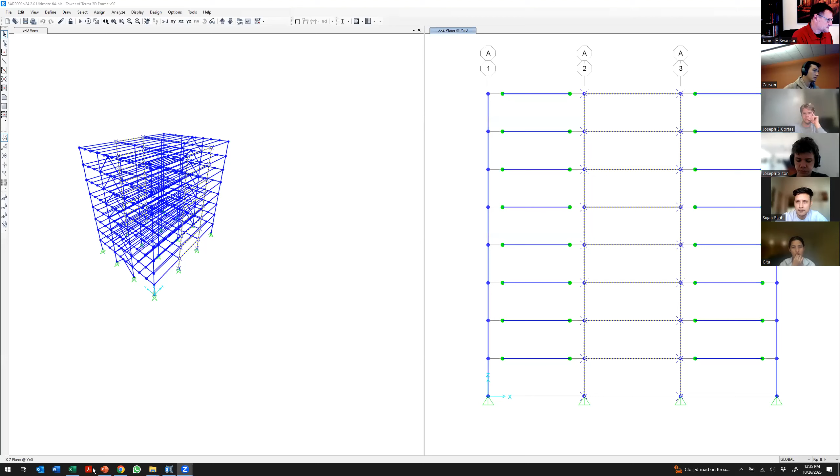I'm going to jump over to my other workstation now. I need to give me permission to share. Oops, that's there. Okay, hopefully you can see my SAP 2000 screen. Yeah, okay, good.

All right, so at the end of lecture on Tuesday, I was moving from 2-dimensional models into a 3-dimensional frame, and I was using the replicate command quite a bit. And I had used it erroneously in one case, and copied the girders in the wrong direction. So I went back through and I fixed that. So what you can see here on the left is a repaired, correct model. I still don't have the right member sizes in there, but for the purposes that I want to use it for, it's going to work just fine.

I did a couple of other things to it as well. One of the things that was missing from the model was I didn't have the gravity framing properly restrained at the bases, and I went back and I added that. And then I deleted the joint constraint definitions that I had as well, and I want to reapply those after I show you a couple of things. One of the things that I tried to do during lecture on Tuesday, not successfully, was to define groups to aid in our manipulation of the model.

So a couple of things here. Over here on the right-hand window, I'm showing a two-dimensional view. And if you look at the tab up here, it tells me where I'm at. I'm looking at the XZ plane at Y equals 0. And if I click in that, you can see in the left-hand pane, there's a little pale blue box that indicates which of those frames I'm looking at. So that kind of helps orient you within the 3D model of which 2D version you're looking at.

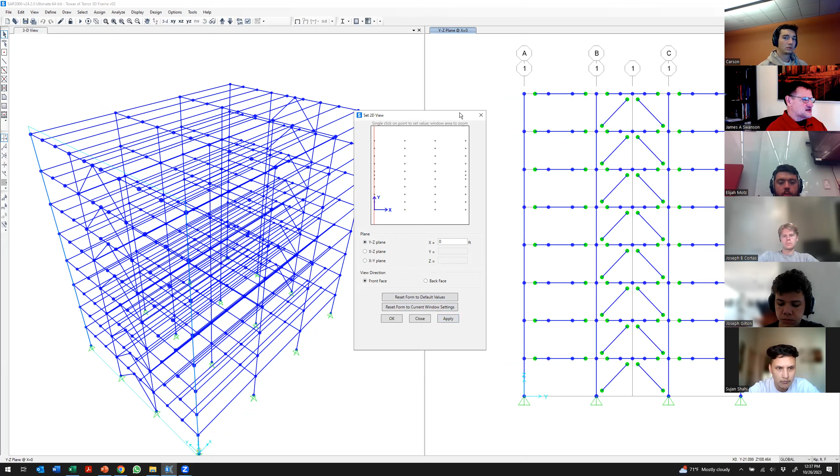In all cases, though, I'm looking at a two-dimensional view here. So there's no way to pan around and look at the way any of the members are oriented or anything like that. So another thing that you guys probably noticed that I did was I can go over here to the left window where I have a 3D view defined, and I can set limits. And if you're conversant in Autodesk Revit, then there's a window box you can use in Revit to limit what it is you're looking at. And this is very similar to that.

And so what I can do is set my bounds. If I want to limit things in one plane or another, let's see, I'm looking at the XY plane now. So if I want to look at just one frame in the XY plane, I can draw a window over that. I hit apply. And now I'm looking at the moment frame in framing line D.

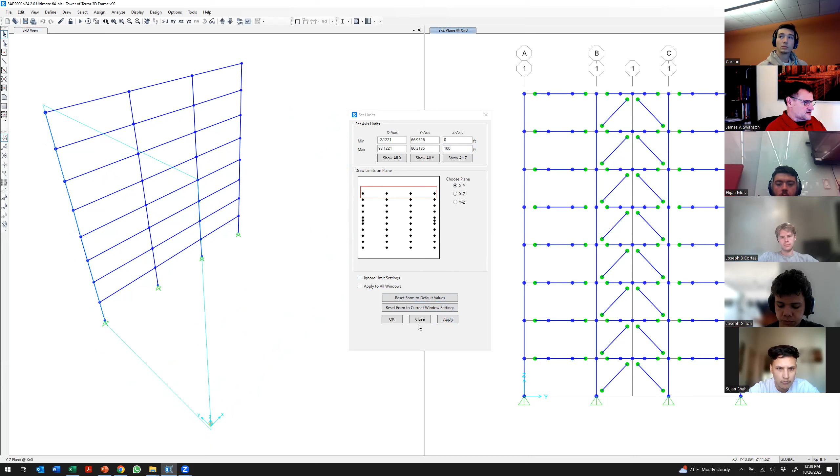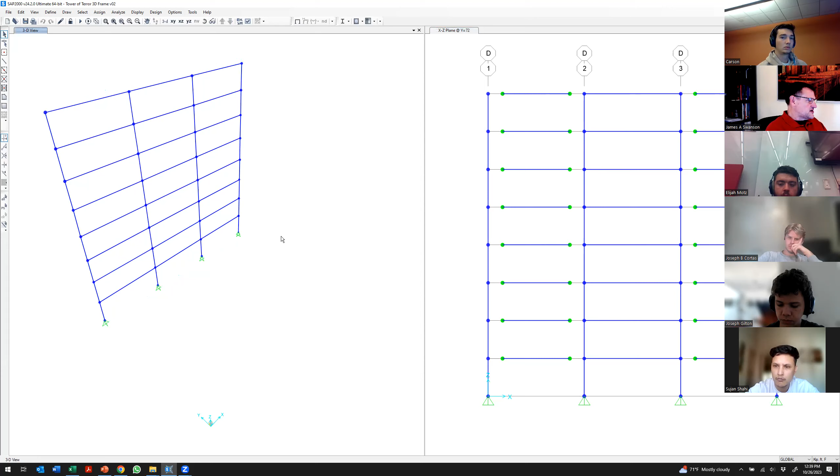Now I can get the same thing over here in this window on the right. So let me do that. Let's go back here, define a 2D view. I'm going to look at the XZ plane at Y equals 72. And so I'm looking at the same frame in both views, but one thing that's important to note is this is a 2D view on the right, whereas this is a 3D view over here on the left. And so I can pan around on this and manipulate it any way that I want to, because it's depicted as a three-dimensional view.

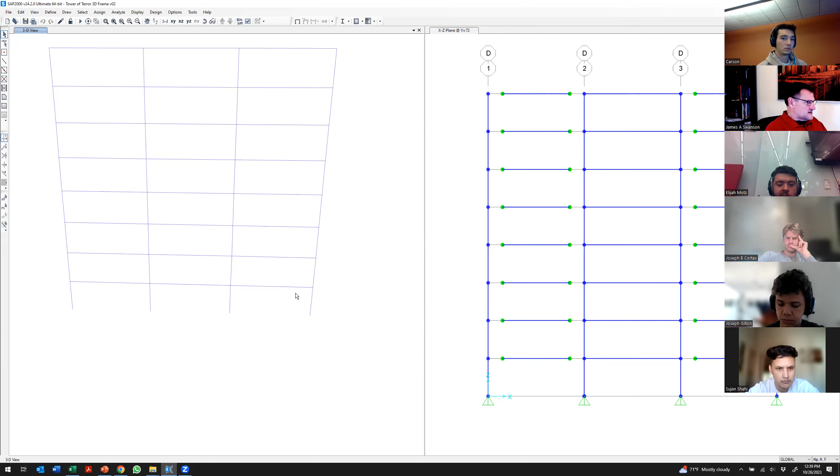And so now I could go in if I wanted to and look at the extrude view of the model. And then I can zoom in and look at the way the members are oriented and that sort of thing. So you can see how the beams and the columns are arranged, right? All right, so those view options are fairly dynamic.

There's a lot of good tools that are built into SAP 2000, but I would be lying if I said that the graphics are awesome, right? If you go and look at something like Autodesk Revit or Autodesk Fusion 360, the graphics and the renderings that are available in those packages are just far superior. I hope that someday in the future SAP 2000 will just go ahead and rebuild their GUI from the ground up so we get better renderings, but their focus is appropriately on analytical tools, not necessarily graphics tools. So that's one of the drawbacks.

And you guys saw with Maggie last week that if you look at Tekla Structural Designer, TSD, the graphics there are, at least in my opinion, better. And I suspect that has a lot to do with the idea that TSD is a younger piece of software. So when it was written, the graphics tools that were available were superior to what's built into SAP 2000.

Let me go in here and get rid of the extrude view. I think I just did that. Nope, I did not. There we go. Now hit apply. Let me do one more thing over here. I want to go back and get rid of the window box or the limits. And so there's a button here. I can show all Y, show all X, hit apply. And then now I get the entire model back.

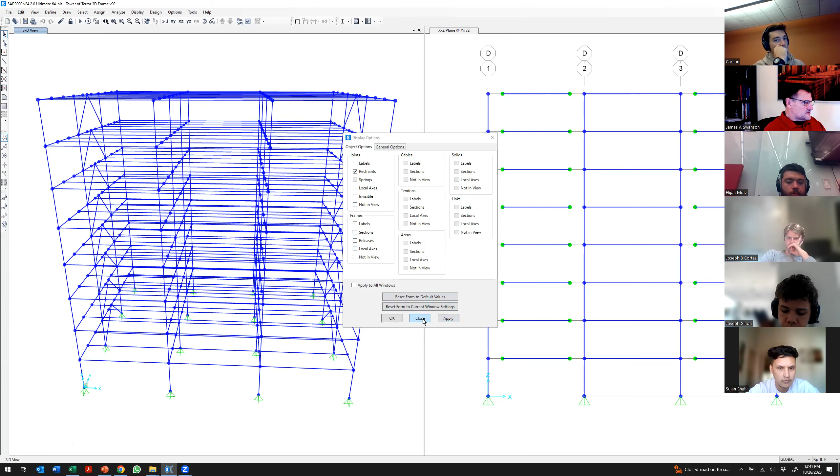All right, I've got the releases shown in there. They kind of make the window a little bit cluttered. So let me get rid of those as well. Okay, good. I can even get rid of the nodes, make them invisible, and then that makes the window even less cluttered. There we go.

Okay, so one of the things that I was trying to do the other day was to name groups, and I wasn't able to get it to work. I think I had the right process, but I didn't execute it properly. I went back and tried it again after class, and it worked just fine. And so the process is 2 steps. One, you go in and define what you want the groups to be. And I have 4 groups defined plus the default all.

And so basically I have one group for moment frame one, another for moment frame two, brace frame one, brace frame two. And so what I did is you define what the groups are. Then the second step is to select something, members or nodes or something like that. Then you go to the assign and you assign those objects to the groups. And so it's a two-step process, much like it is defining a joint constraint.

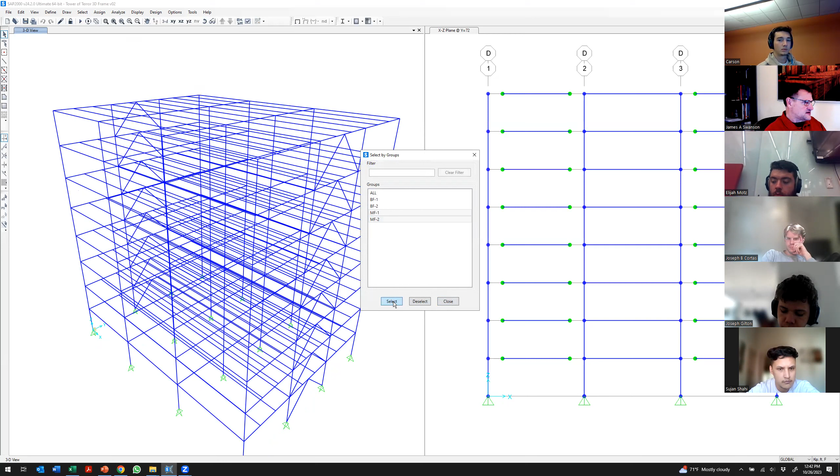And so the benefit to that is that you can isolate those things more easily than you would be able to without. So for example, if I want to just look at the moment frames in this view on the left, I can go in here and say select, and then I can select using groups, and I can select all the objects that are assigned to the two moment frame groups that I defined before class. I hit close. Now what I can do is go over here to the view window and I can show just the objects that are selected.

And so now I'm looking at a 3D model that has all of the beams, columns, and braces in it, but I'm only looking at the beams and the columns that are part of the moment frame groups. And so that could be really useful when we're looking at the results afterwards, because now I can go in and analyze just the moment frames and the view isn't cluttered by everything else.

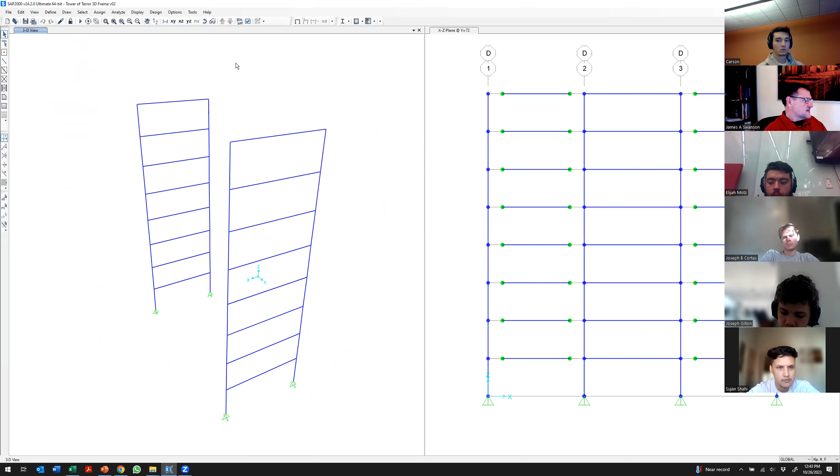So let me go ahead now. I'm going to go back to view. I want to show all. Let me show you how I would do the assignment for the two brace frames. So I need to remind myself what the framing layout is. So off screen here, I have the PowerPoint that we've been working from. So I've got brace frame one is in framing line one, brace frame two is in framing line four. I should have a better naming system, but I don't.

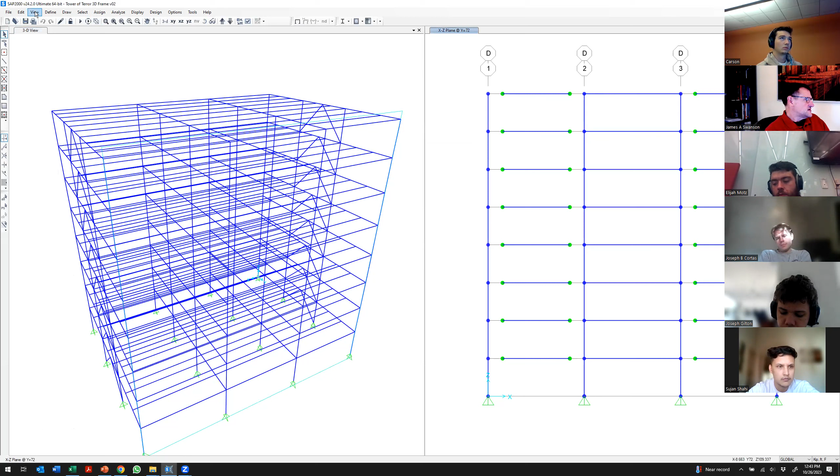So let me go over here in my 2D view. I'm going to define that 2D view. I want to look at the YZ plane at X equals 0, which is framing line number one. And so that brings up this 2D view on the right. I can go in here now, window over the members that make up the braced frame. Now I can go to the assign menu, go to assign to group. I want those to be a part of braced frame number one. Okay, let me close that.

Over here on the right, I'm going to switch over to the YZ plane at X equals 96 feet. And that gives me brace frame in framing line number four. And then I'll do the same thing. I'll window over that brace frame. Now I'll go to assign to group, and then I'll assign those objects to brace frame number two. Hit apply, hit close. I'll close this window out as well.

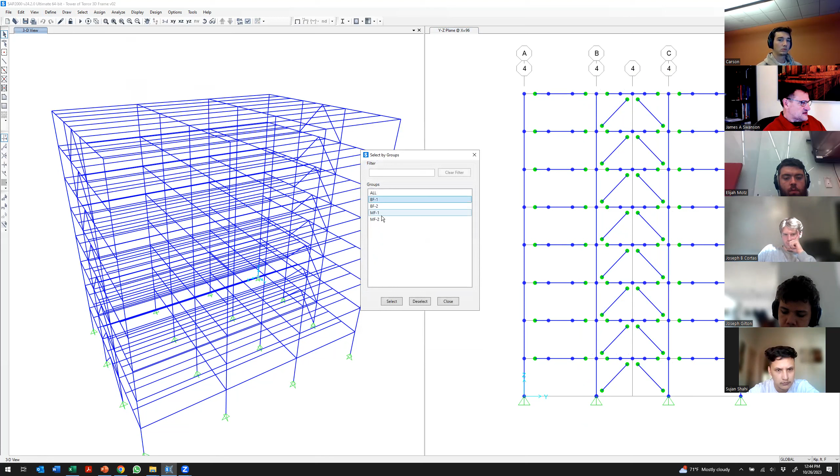Now what I can do over here is I can select based on groups. There it is. And now I can select all four of those lateral frames, select those. Then I can go to my view menu and I can just show the selected objects. So now all you see are the lateral frames that are part of that model. Now, the rest of the framing that's in the model is gravity framing.

So what I can do then is I can go over here to the select. I can invert the selection. Invert selection. And so that basically selects everything that's not part of those groups. And so there's nothing in the view on the left to see that was selected. But if you look over here on the right, it selected the remaining members. So now I'm going to go in and assign those to a group.

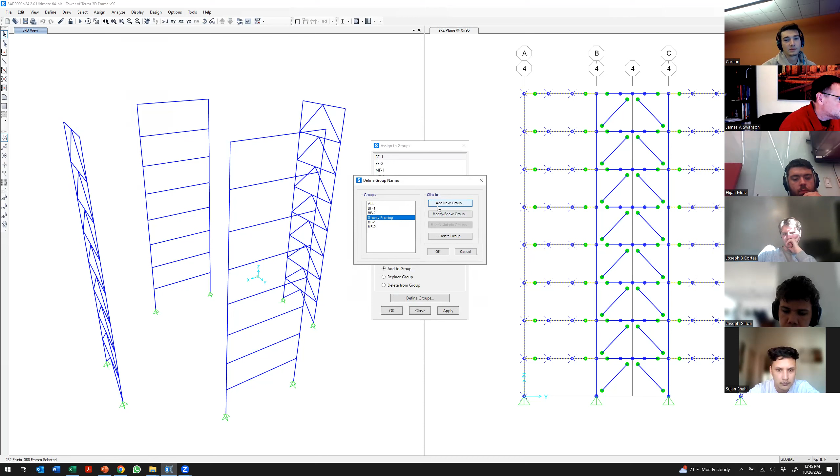I'm going to go to my group definitions. I'm going to add a new group. I'm going to call it gravity framing. If I can spell it right. Nope, I still spelled it wrong. Okay, and I'll go ahead and hit OK. I'll hit OK again. Now I'll go over here and I'll add those members to that group. Hit close.

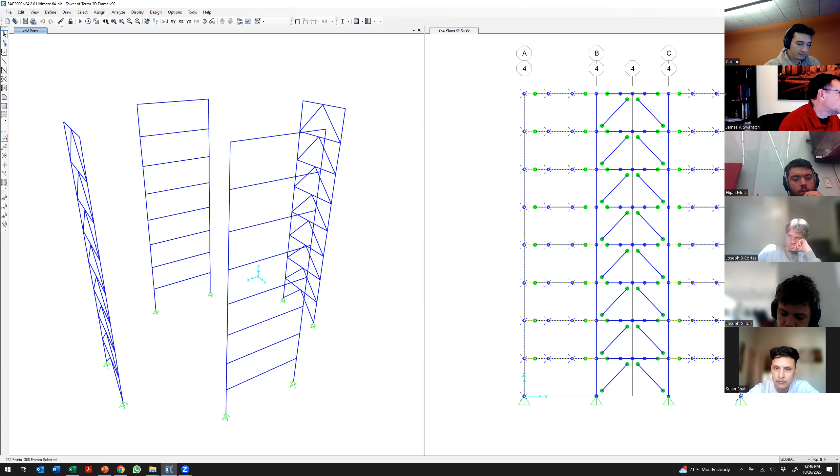Now I can go over here. I can go to select by group. I can select the gravity framing. Even though it's not shown in the window on the left, it's still selected. And now I can go here to view and show selection only. And now I get the gravity frame.

And so what you can see is that we're missing pieces of the model, and everything that's missing is something that's been assigned to the lateral framing groups instead. So I was trying to show that on the fly on Tuesday, and I hadn't rehearsed it beforehand, so I must have screwed up the order of operations or something along that line.

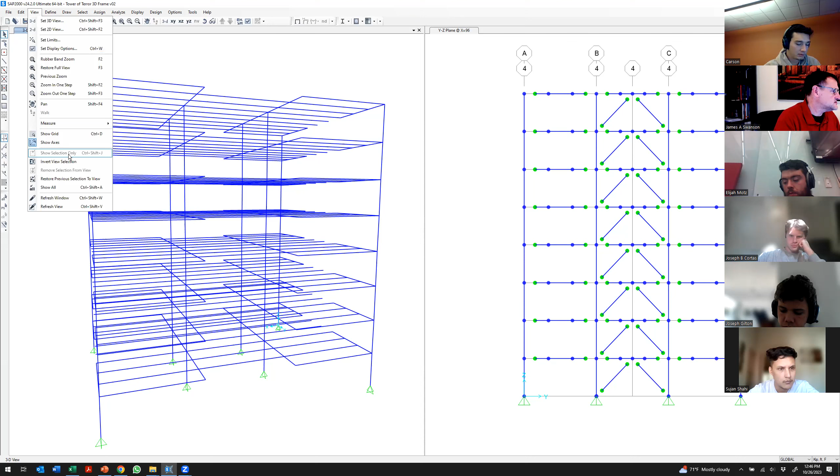So, all right, let me go ahead and show all. So that's Control Shift A. There we go. Now the entire model is back in here. So I told you that after I finished class the other day, I removed the joint constraint definitions that I had. So one of the things you'll see here is that I don't have any joint constraints.

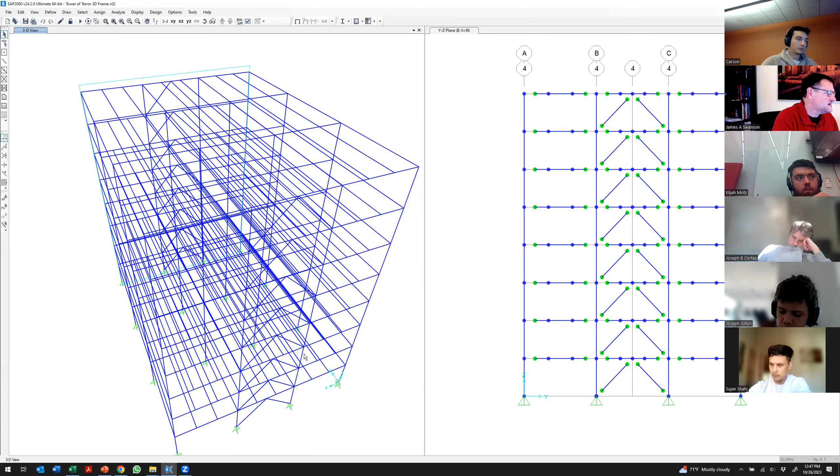And to illustrate the idea of the importance of a joint constraint, what I'm going to do is put a couple of loads in here. I'm going to go ahead and just select these two nodes on that face there. So I'll hit Shift and select that one. Come on. There we go. And I'm going to apply a load there. That's going to be in the X direction. So I'm going to go in here.

I'm going to assign joint loads, forces, and let me go ahead and add it to, I should create a new wind load, but let me do that. Define load patterns. Let's call it W, and I'll call it point loads because it's going to be point loads. It's going to be wind like that, and I'll add that in. Hit OK. Now, if I go in, I can assign joint loads there.

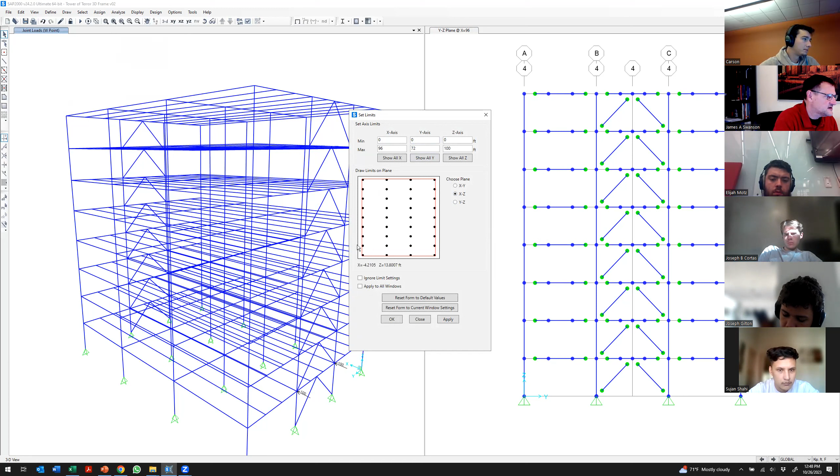Let me just make up a large number. It's going to be in the X direction. Let me put 100 kips at both nodes. I hit Apply. I hit Close. Now, let me define my limits, and I just want to look at the first story of framing. So let me look at the XZ plane here, and I'm just going to window over that, which gives me my first story of framing. There we go. Okay, now if I go in and run this model,

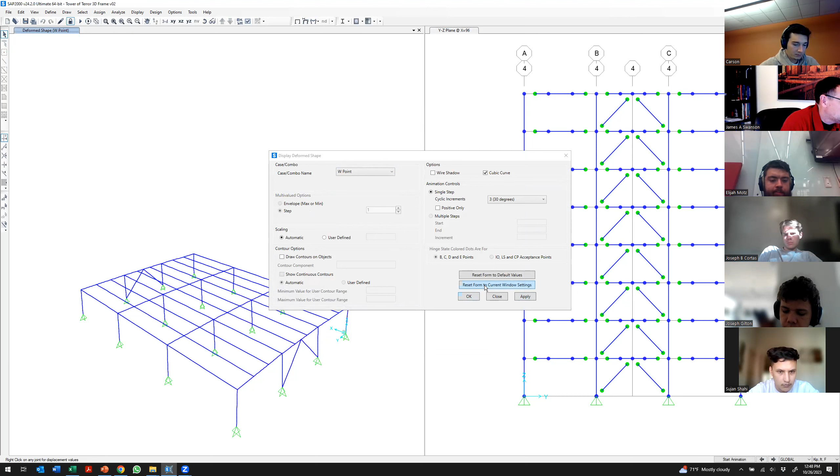I can go in and look at the displaced shape that I have under that wind load. So let me go in here, select W point, hit Apply, and let's close this window out, and we'll animate that.

I love the noise. All right, so you see the problem that we have without the diaphragm defined in this model is that the loads where they're applied at this edge aren't transferred over very well to the moment resisting frames that are on framing lines A and D. And there's a little bit of transfer of force over there through some frame action that exists in the model. But what we would expect to see instead is that thing shift as a plate element or as a

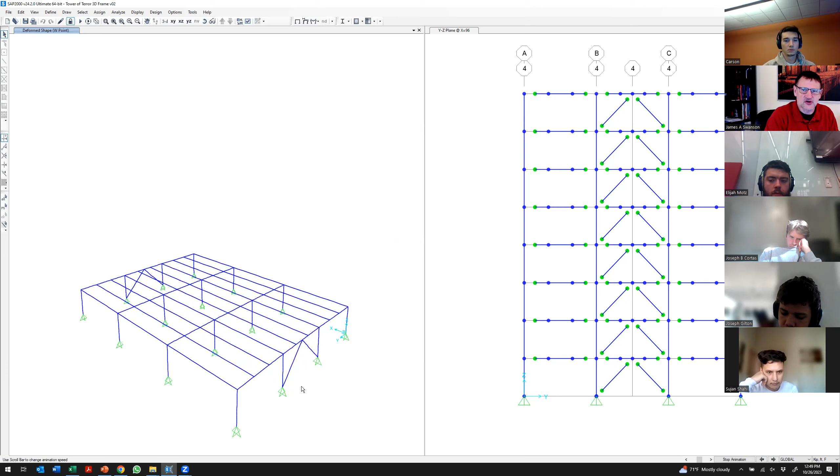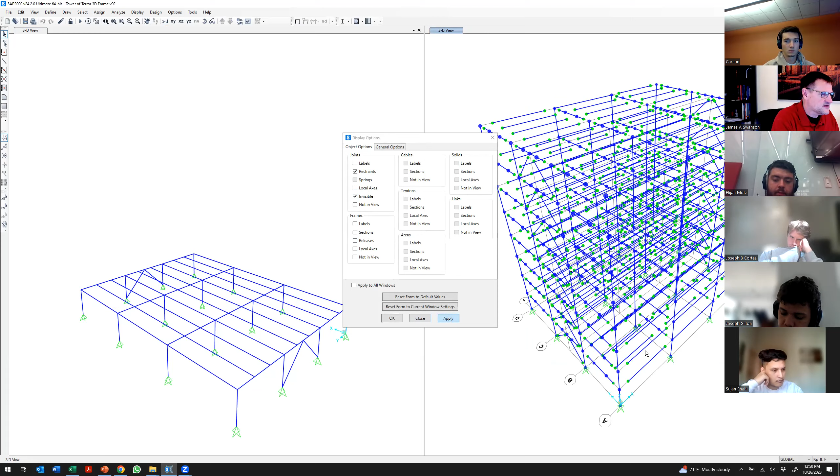diaphragm. And so what I want to do now is go back in and define diaphragm constraints and show you the difference in behavior that occurs when I do that. Let me go here on the right. I'm going to define a separate 3D model. Let me get rid of those member releases, rather. There we go. Now I'm going to orient this model so that I can select a lot of nodes.

Let me go in and define the constraint first. Joint constraints. I want it to be a diaphragm constraint. Add that. And it's going to be Z-axis, and we'll say we want a different one at each Z level. Hit OK. Hit OK again. Now what I'm going to do is select all of the nodes, but I'm not going to select the nodes at the ground level.

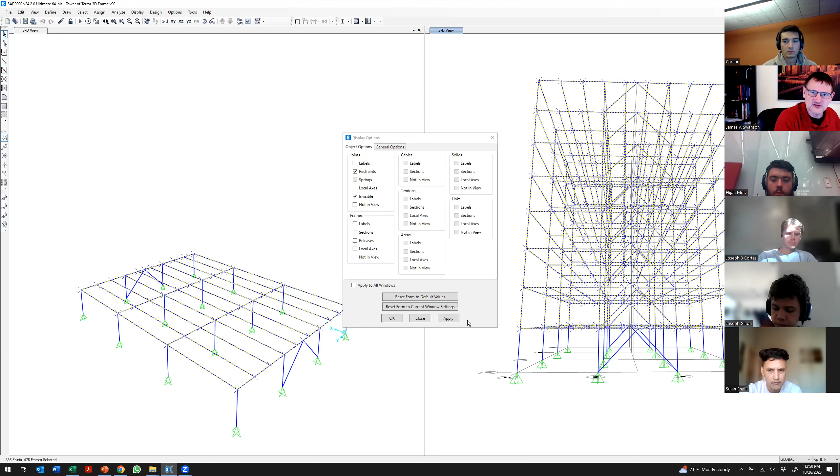I did that the other day, and I think that led to numerical problems where we have a constraint assigned to nodes that were also restrained. And so if you assign a constraint and a restraint to the same node, you're basically over defining its degrees of freedom. So let me go here now to assign joint constraints, and I'll assign the diaphragm constraint to all of those nodes. Okay, I'll close that out. I'll close this out as well. Let me go in and redo the analysis.

And now let's look at the deformations that we get out of those wind loads. So looking over here on the left, now you can see how that translates as a rigid diaphragm instead of having the frame action and giving us the in-plane deformations that we don't want. All right. So at this point, then the last step would be to go in and define our loads a little bit more explicitly. So let me show how I would do that.

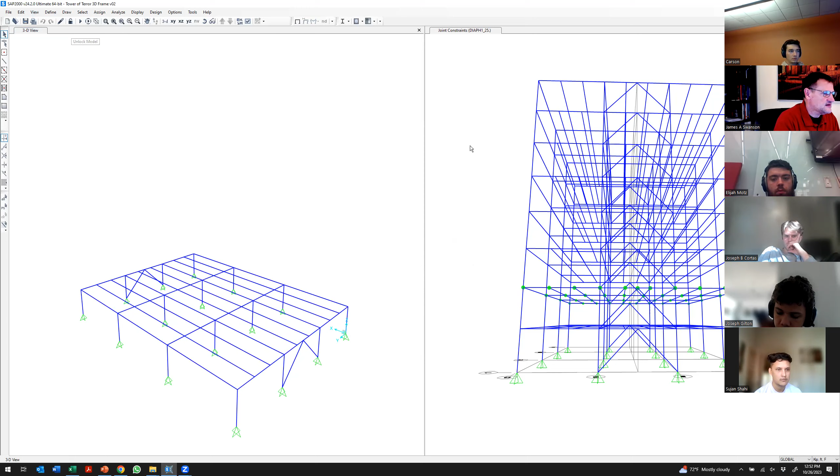Let me unlock the model. Thank you. I can use this model here. I'm holding down the shift key and then the center mouse button in order to pan around.

And yeah, the graphics are getting a little wonky, for lack of a better word. I think that when I'm using Zoom to capture the screen and I'm using SAP 2000, I don't think those two packages play very well together. There we go. Now refresh that.

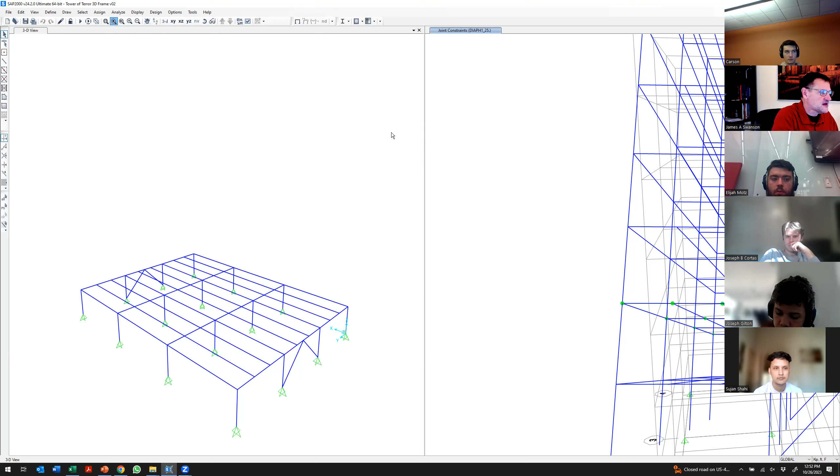So what I want to do is I'm going to go in and define my load patterns again. And the other day when I had diaphragm loads, I had the loads in the X and the Y direction defined in the same load pattern, which makes it impossible to decouple them. It's impossible then to apply the loads in the X direction without the loads in the Y, or vice versa. So I'm going to go ahead and delete that load pattern. I'm going to create two new ones.

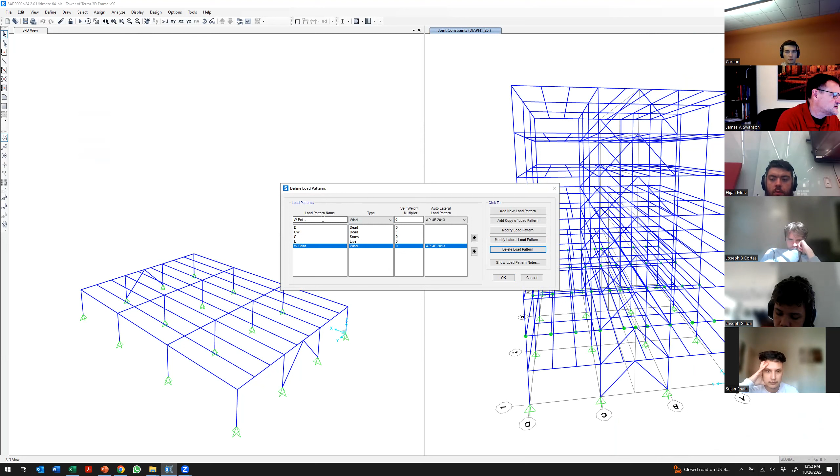I'm going to call it WX for wind with a user-defined wind pattern. Let's see, add new load pattern. I'm going to call this W sub Y with a user-defined load pattern. There we go. And so what I'm going to do next is go in to my model, and I'm going to define the wind loads that I want to apply to this structure. So here's our wind criteria.

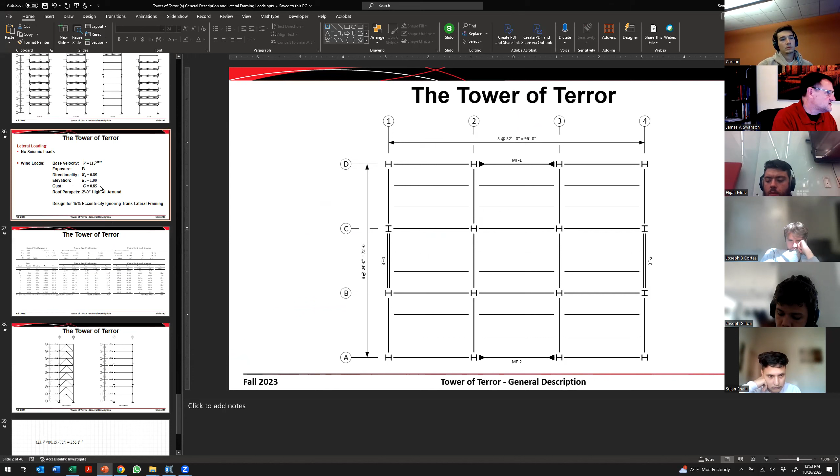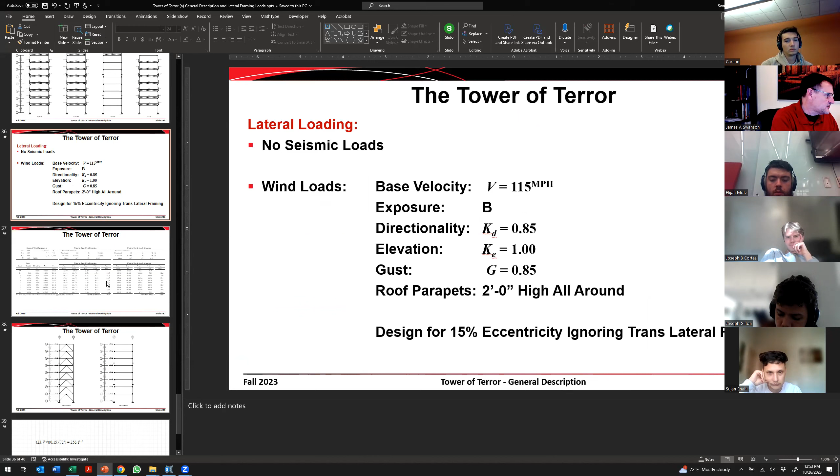We want to apply the wind loads that result from a 115 mile per hour base wind velocity with an eccentricity of 15%. And so what I'm going to do is basically take these loads here, 23.7. That's going to be the force that I apply, but I also need an in-plane moment as well. So if I go in and multiply that force of 23.7 kips times 15% of the breadth of the building, 15% of 72 feet, then what I end up with is an in-plane moment of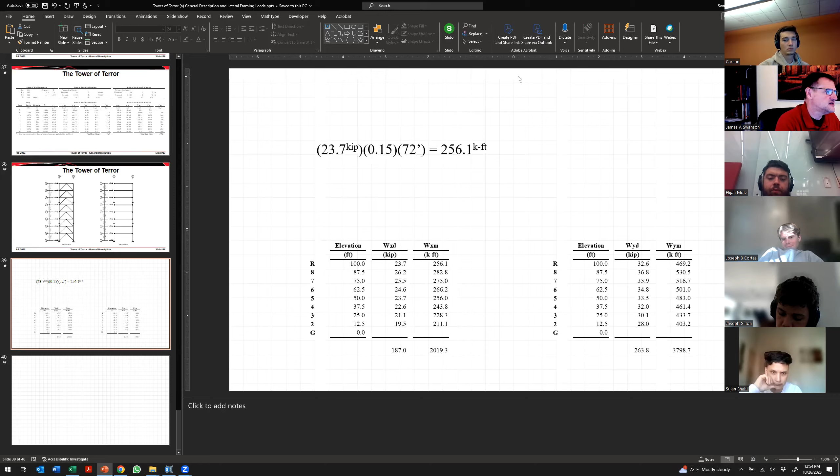256.1 kip feet. So I'm going to take these values here, W sub XD and W sub X moment. That's the wind in the X direction that's directly applied as a force and the moment that results from that. And I'm going to define those in the wind load definitions for the diaphragms. So I can go now to define, go back to load patterns. I can go to my WX case, and I can go to modify lateral load pattern.

And so what I'm doing then is just typing those forces in, 23.7, and then the moment that I have that goes along with that is 256.1. And so I got to make sure I'm in the right units because I've got kips and feet, and that works out just fine. I put that in the wrong box, so let me fix that. That should be FX, 23.7. Okay, down here I have 26.2, and then 282.8. Right, and you basically can enter in your story forces like this, and I find it to be a lot easier than applying loads to the outside of the building.

Okay, I got the wrong number again. I just talk about how much easier it is, and then I screwed up. 266.2 here. Right. And so we could go through and do that for all of these. 23.7. Let me do it this way. 22.6, 21.1, and 19.5. This here is going to be 256.0. This is 243.8. This is 228.3 and 211.1.

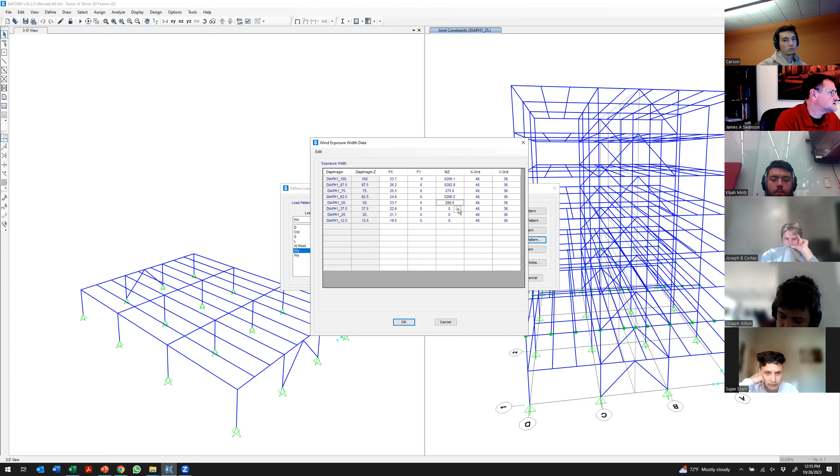Okay, I'll save you the agony of watching me put those in the other direction. Let me delete those point loads. Don't need that anymore. Hit OK. Now I can go through and do my analysis. All right, and so what I can, oh no, I got an unstable.

Welcome back. Ah, good. There we go. I was worried everybody else left. Yep, that's Spectrum for you. All right, let me get back in here. So I'm on my Verizon phone right now. I have 5G service, but in order to make it work, I have to perch it in the window. Okay, pardon the interruption. I wonder if that'll come out as one recording or two.

Find out, I suppose. All right, so yeah, over here on the right, I'm going to select the XZ plane again. Let's look at the moment frame on framing line A, I think it is. And so there we go. Now what I can do is come in and look at the moment diagrams over here on the right. So I can go to frames, look at wind WX.

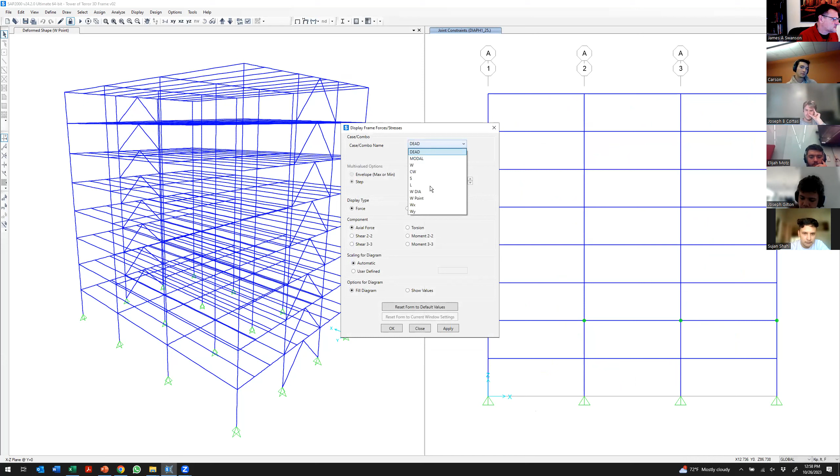I can look at the bending moments that I have. And I get bending moments in the members that I would expect, and I don't get bending moments in the members that are supposed to be pinned. So none of the gravity beams have any bending moments in them, but the columns over here on the corners, those are gravity columns. They still have some bending moment in them, though, but it's small.

And the reason there is bending moment in those columns is because those columns are continuous across the floor levels. We don't pin them at each end. You can do that, and it's not irrational to pin them in the model, but when you do that, then you run the risk of getting some instabilities in the model that would create problems for you. If you release it too much, then you'll start to get warnings out of the software that aren't great.

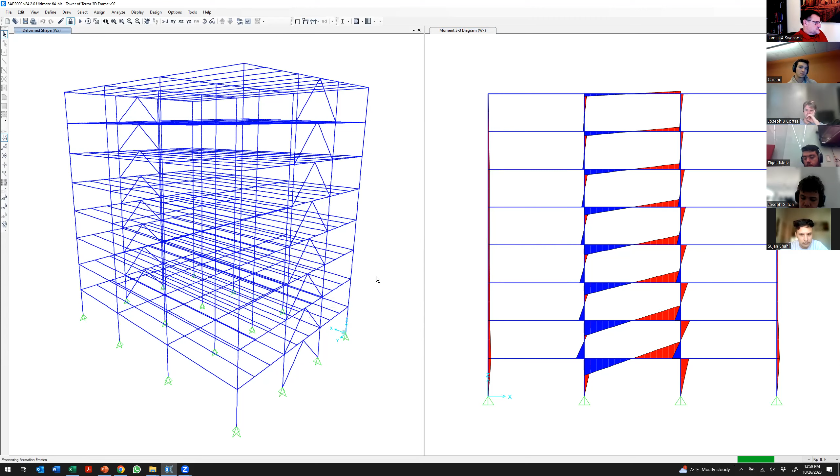Then we can go over here and look at displacements in the 3 dimensions. So we can go to WX, hit apply, and we can animate that. Right. And if we go in and look at the 3D view from the top, let's see, I'm better off doing this. Stop that. And then hopefully from this direction, you'll be able to see translation and a little bit of rotation. I don't see the rotation, but it's there.

All right, so that gives us a lot of tools to work with. We're still missing a few things in this model, though. Most notably, I haven't applied any of the gravity loads. I haven't applied the snow load to the roof, the dead load to the members, the curtain wall load. I haven't applied the live loads or anything like that.

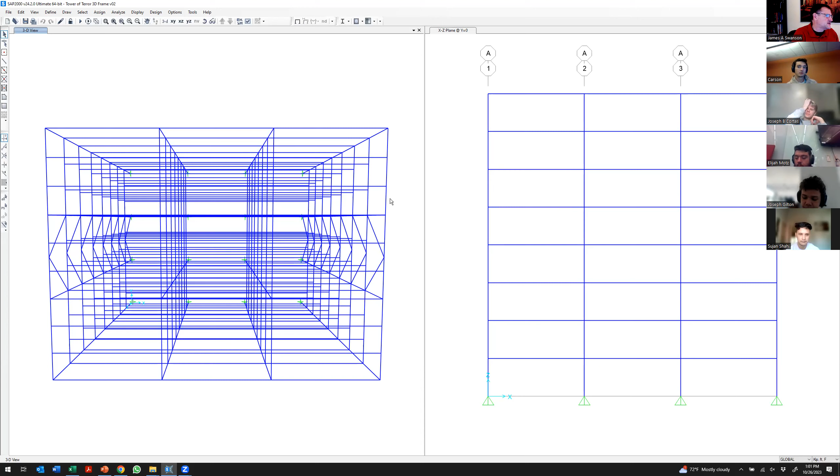And the reason I haven't taken the time to do that is, number one, I don't want to bore you guys any more than I already have in class. But second, there's a really easy way of doing that if we use shell elements. And the problem is that we don't yet know what shell elements are. So let me go ahead and shift gears to our presentation on continuum elements. Let's see, I gotta find that. There we go.

All right. And so the first thing we want to do is define what a continuum element is. So what we've been doing so far is using discrete element modeling, where we basically use one element or one object to model every physical object that's in our structure. Now, it's not strictly true when you talk about automatically meshing beams into 8 sub-elements or 10 sub-elements, then we're not really using one element for every physical object in the model, but I think that that's still a fairly

good definition. On the contrast, finite element modeling is where we use several elements to model each physical object within our model. And the most common type of element that we're using in that case is a continuum element. Beams and frames and trusses, those are line objects. They only have one, let's see, one dimension that defines them, and then you apply section properties to them.

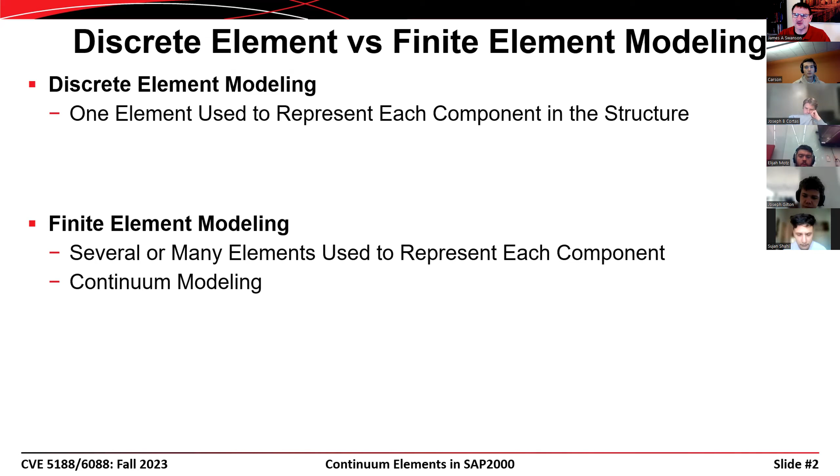So when you look at the definition of a line object, it has a length. Then you assign section properties to it, but in our model, it doesn't necessarily have a height or a breadth. Continuum elements, on the other hand, usually have at least two dimensions that define their geometry, either a length and a width, sometimes also a depth if it's a three-dimensional object.

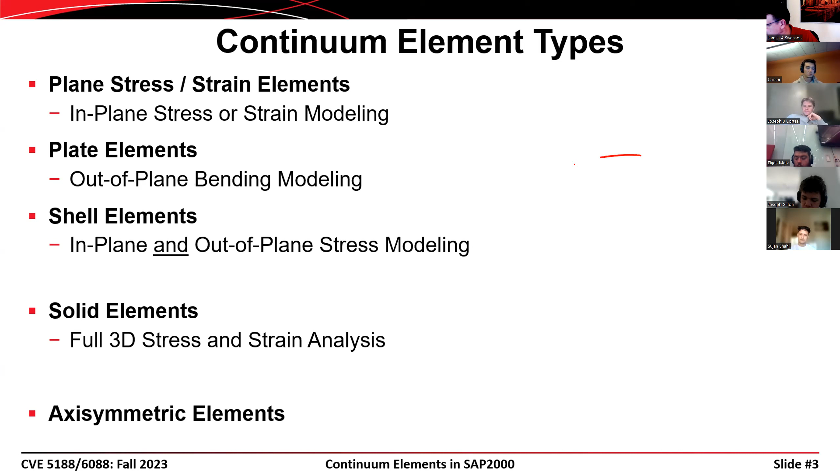So the type of continuum elements that are available in general are plane stress or plane strain elements, plate elements, shell elements, solid elements, and then axisymmetric elements. So an axisymmetric element is an interesting element that we don't use very often. But if you have a structure that has an axis of symmetry, then you can use an axisymmetric element to model that.

And so a common example that I use is if you had like a cooling tower on a power plant like this, for example, then you would have an axis of symmetry that goes down through the center of that cooling tower like that. And so what you could do then is define an element that is axisymmetric, and you could model the behavior of that cooling tower by just defining a section. And then the model, when it does its analysis, takes that section, revolves it around the axis that you define, and so you can have an economy in your analysis by using that axisymmetric element. What we're going to use most often in our class are the shell elements.

If you go into more advanced finite element modeling, some of the graduate level courses, then we use solid elements quite a bit in programs like Abaqus or ANSYS to do modeling of components and things like that. In this class, the shell elements are very useful for us to model planar objects like a floor slab, like a bridge deck, like a shear wall, things of that nature. And so that's where we're really heading with this.

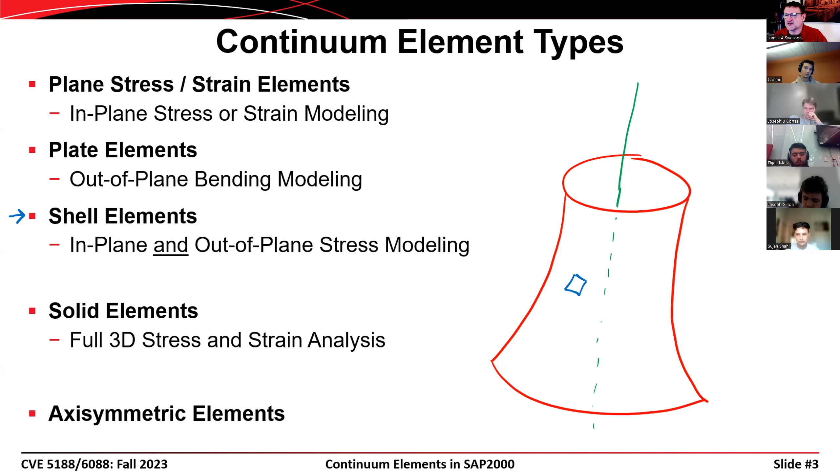The rest of the stuff isn't uninteresting, but for the purposes of this class, we need to know what shell elements are in order to be able to use them in our models. All right, so let's define these elements. The plane stress and plane strain elements come in a couple of different flavors. There's a triangular element that has 3 nodes and a quadrilateral element that has 4 nodes. It looks like a square, but it doesn't have to be square. It just has to have 4 sides. So that's why we call it a quadrilateral element.

And so when you go and look at this, the 3-node triangle has 3 nodes defining its geometry. So J1, J2, J3, joint 1, joint 2, joint 3. And then we have the local axes here, local axis 1, axis 2, and then the local 3 axis is perpendicular to the plane that's defined by those three nodes. And then at each one of those nodes, we identify 2 degrees of freedom. So this element has a total of 6 degrees of freedom associated with it, 2 degrees of freedom at each node.

And so one of the limitations is that it doesn't permit any out-of-plane deformation. It doesn't permit any bending either. It's totally a plane element. The one on the left is very similar to the one on the right. The quadrilateral is similar to the triangle, with the exception that we have a 4th node that's defined. And along with that come 2 more degrees of freedom, degrees of freedom 7 and 8, as I've shown here.

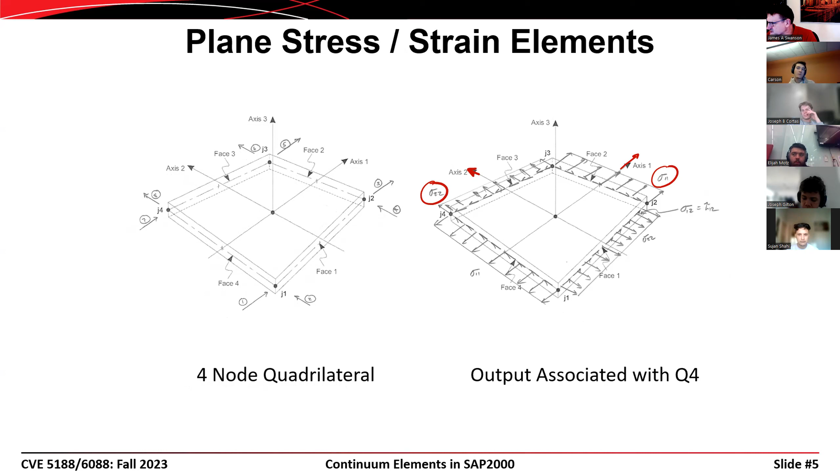All right, now when we look at the output that's associated with these, we usually look at the stresses that are in the local directions. So we have the 1 axis here, so we have a sigma in the 1 direction, sigma 1,1. We have the 2 axis here, so we have a sigma in the 2 direction, sigma 2,2. And those are normal stresses. And then there's also a shear stress as well. And on this face here, we'll define it as sigma 1,2. And that's really a shear stress.

But if you go back and look at it from a fundamental point of view, a lot of the older texts don't distinguish between sigma and tau for the shear stress. They just use the notation sigma 1,2 as a shear. So if it's a sigma 1,1, it's a normal stress. Sigma 2,2 is a normal stress. Sigma 1,2 is a shear stress. And so the notation there is that that's sigma on the 1 face, but acting in the 2 direction. That's, I think, how that works out with that notation. And that's something that might vary from one package to another.

All right, so when we look at plane stress elements, by definition, the stress in the perpendicular direction, the 3 direction here, is going to be equal to 0. When we look at plane strain elements, then the strain in the 3 direction is equal to 0 instead. And so at first thought, you might think that the two are equal, but they are not. If you have plane stress, that means that the outer surfaces of your element are free to move in and out. So if you take a plane stress element and you pull it, it's going to get a little bit thinner because of Poisson's effects. But the stress is always equal to 0, even if the strain in the 3 direction is not.

On the other hand, if you look at a plane strain element, then the strain is taken as equal to 0. So if you pull on it in one direction, it doesn't get any thinner, but instead it develops a stress corresponding to the restraint that you apply in that 3 direction. So most often we're looking at plane stress elements that are useful to us. If you were going to model, say, a plate to represent the flange of a beam, most often you would use a plane stress type of element. But there are cases where a plane strain element is appropriate, and if you were going to model a gravity dam, for example, a weir, then you would probably take a slice of that dam and model that section.

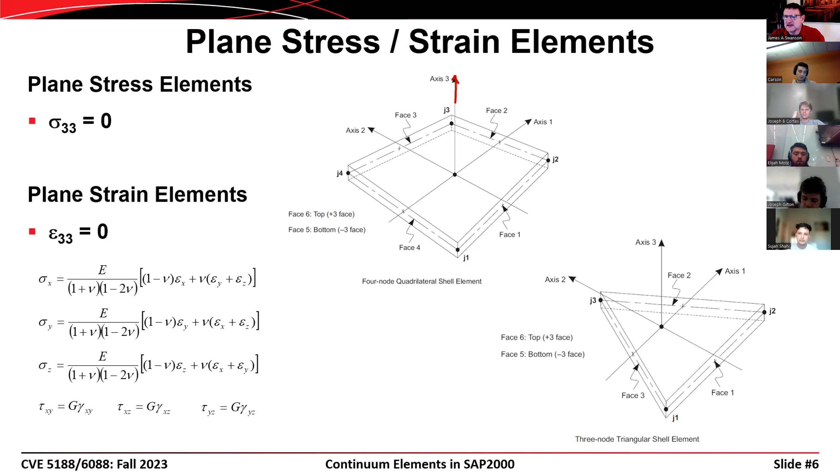And because that dam is generally much longer than the sectional dimensions, you would probably choose to model that with a plane strain element instead, because that dam, being as long as it would be, isn't free to contract or expand along its length. Okay, when we look at plane stress elements compared to a plate element, you can see over here on the right, we have different degrees of freedom defined.

First of all, the plane stress element doesn't have anything going on out of plane, right? So we have forces that are in the plane of the element. Whereas with a plate element, everything is out of plane. We have an out of plane shear at each of the 4 nodes, right, or out of plane displacement. And then we have rotations or moments that are acting here as well.

And so that moment, the 6th degree of freedom there, actually causes a bending that would result in, let me see, put my thumb that way, that would actually cause a bending that would result in out of plane deformations. And so that's not admissible for a plane stress element, but for a plate element, it is admissible. So when you look at a plate element like this, we end up with 1, 2, 3 degrees of freedom at each of the 4 nodes. So we have 12 degrees of freedom total.

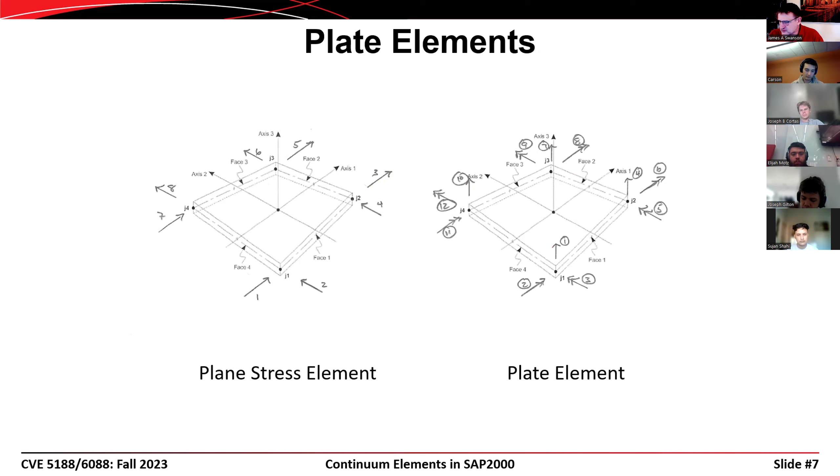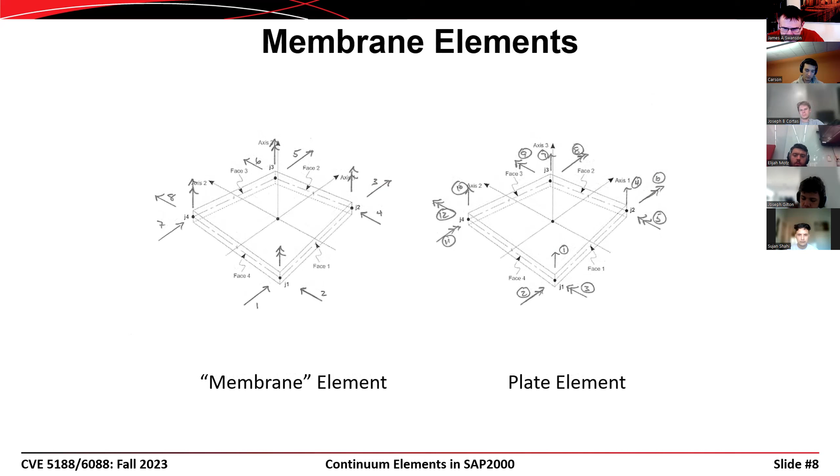One thing that's missing from that plate element, though, is a drilling degree of freedom. And so if you look over here on this left, now this is a membrane element that has a drilling degree of freedom. And so we refer to that as such because the rotation of this would tend to cause drilling down through the element. So when somebody says a drilling degree of freedom, it's unambiguous, right? It always means the same thing.

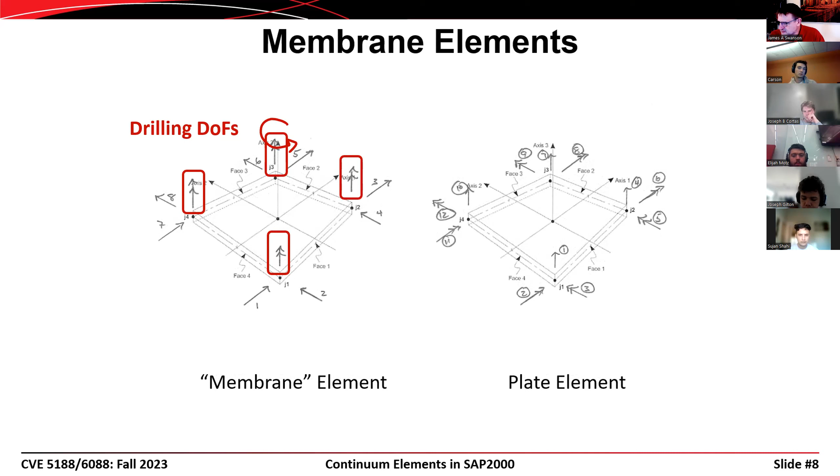If we look at a shell element, that combines basically the best of the plane element and the plate element for the applications that we're going to see in civil and architectural engineering structures. So we have in-plane deformations, we have bending moments in plane, we have an out-of-plane translation at each of these nodes as well. So you can see each node here has 5 degrees of freedom because this particular element lacks the drilling degree of freedom.

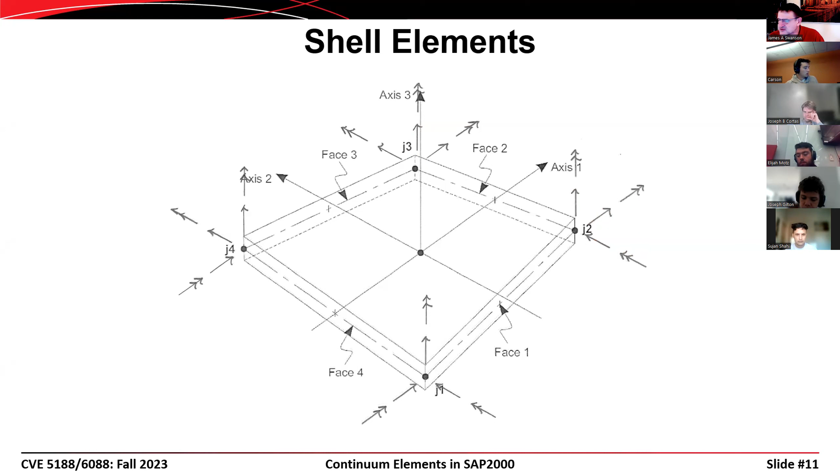When it comes to modeling things like bridge decks and floor slabs, we don't need that drilling degree of freedom very bad because we don't often have to worry about applying a concentrated moment in the plane of the deck at any one point. We do have to apply in-plane rotation sometimes, but there's a workaround for that. So these are the degrees of freedom you would see with a conventional shell element. Occasionally, you'll see a shell element formulation that has that drilling degree of freedom as well, but by and large, you don't have that.

And the reason to omit that is you don't need it, and it makes the element a lot more computationally efficient. When you start adding these continuum elements, there's extra hoops that you have to jump through in order to get them to work in the analysis. And those hoops can be costly in terms of computational efficiency. Number one, you need a lot of them. So you use a lot of automatic meshing.

So you wouldn't want to have an element that has dimensions of 24 feet by 32 feet, for example. You would want to break that down into a bunch of elements that are 6 inches by 6 inches. So there's a ton of those elements there. So that increases the computational cost. And then second, there's not really a direct formulation for the stiffness matrix associated with a continuum element either. You have to go through a process called numerical integration in order to go from the geometry of the element to the stiffness matrix for that element. And that integration process is costly from a computational point of view.

Before we get to that, though, I want to point out that we have solid elements as well, three-dimensional elements. And most of the time, we're going to use an 8-node solid element, brick element, sorry, not quadrilateral. And so typically these elements have 3 translational degrees of freedom in each of the nodes. They don't often have any rotational degrees of freedom.

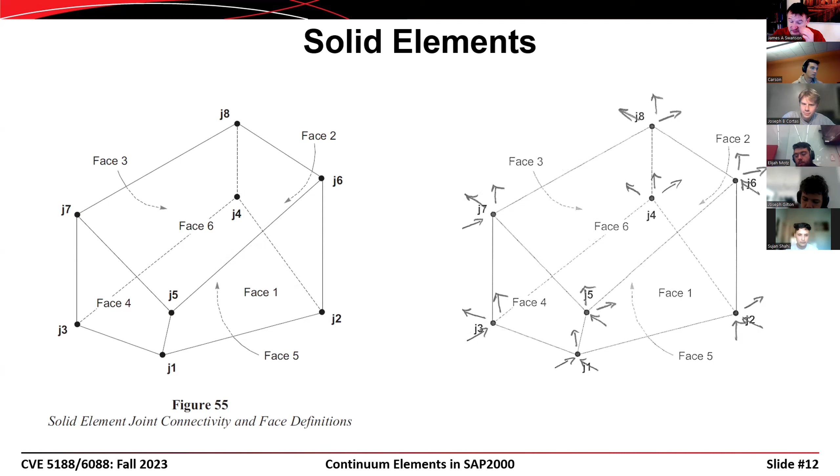So when you model things with a brick element or a solid element, in order to handle rotations, they have to be accommodated by using a couple system. So you have 2 forces acting at a distance, and those 2 forces create a moment. Correspondingly, you have 2 displacements acting over a distance. You take those 2 displacements, you can figure out what the rotation relative to those 2 nodes is, and that's how you handle rotations and moments when you have a continuum model made out of brick elements.

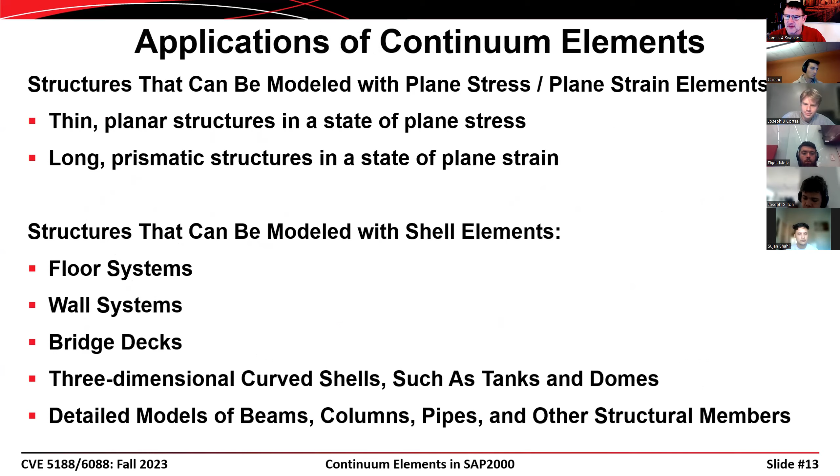All right, so here's some applications for our continuum elements. I've been using these already quite a bit. So floor systems, wall systems, bridge decks, to a lesser extent, curved shells such as tanks and domes, and then other detailed models. So here's one example that we use a lot. This is a screenshot from the program Abaqus.

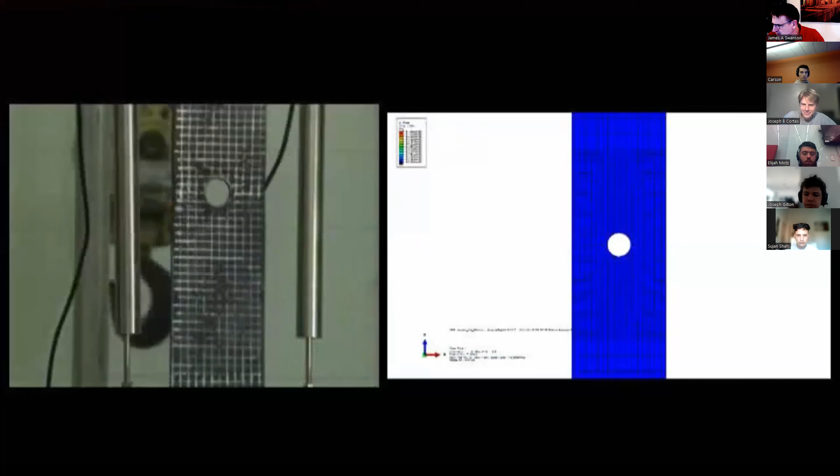And some years ago, we were working with some plates in our laboratory where we were actually looking at the ductility of holes that were punched. And so, Joe, it's not dissimilar to what we're doing now, except these were punched holes instead of the flame cut holes. And so we had a student come in and do some modeling in Abaqus. We tried to capture the fracture that existed in our experiments with the finite element model.

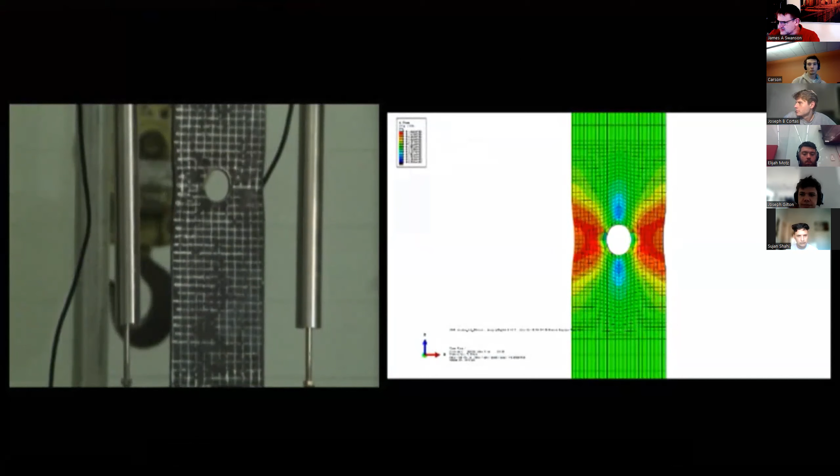And so you can see the experiment on the left and a loosely correlated model over here on the right, and you get some fracture that's in the model and then some fracture that's in the experiment as well. So that's a good application for a continuum element. That would be a plane stress element or maybe a brick element as well.

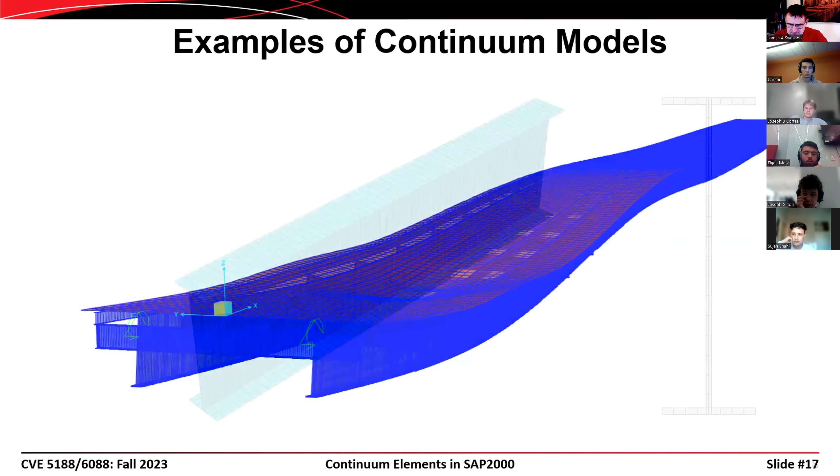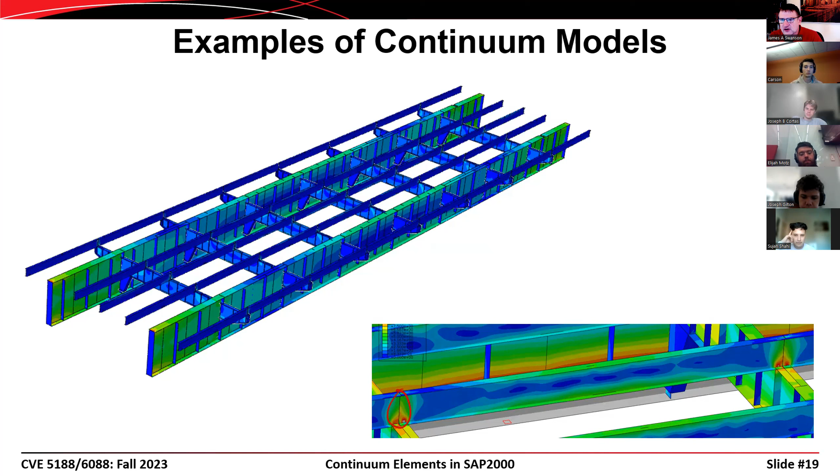Now, this particular structure was modeled again in Abaqus. Let me skip this slide for a second. What we did was we constructed a high resolution model in Abaqus because we wanted to look at the stress concentrations around the area where the stringers framed into the floor beams. We wanted to make sure there was enough strength here in order to avoid failures like web local yielding or web local buckling and things like that. So this was a model constructed in Abaqus, and here we aren't showing the elements that correspond to the bridge deck.

Okay, here's another model. This one was a model that was constructed by Ryan Carlson. He did some research on looking at ductility of I-shapes with holes in the tension flange that are subjected to a bending moment. So the idea is that you apply a negative moment here, then you end up with tension in this flange.

And we wanted to look and see how much moment could be accommodated. Could these still reach their plastic moment capacity, even with holes in the tension flange? And so that was a model that was put together by Ryan Carlson.

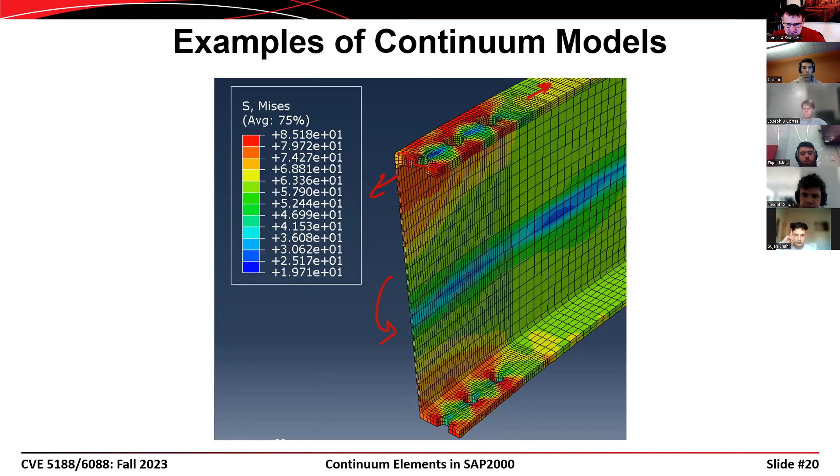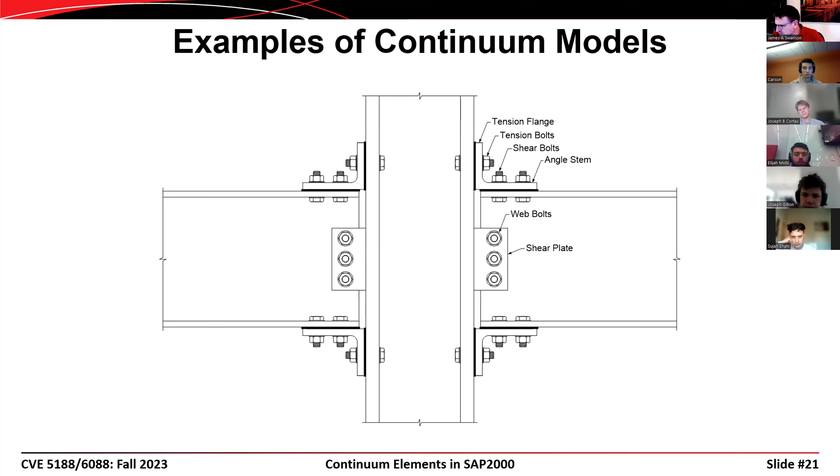Here's some work that I did at Georgia Tech. This was a beam to column connection using top and seat angles. And we wanted to examine the behavior of this joint in a high amount of resolution. So we constructed a model of it, and this goes way back to the 1990s when we did this work.

And so the model isn't very densely populated, right? We only have 1, 2, 3 elements for the web, so that's a rather coarse mesh. But at the time, that was really a high-tech thing. I think when I ran this on a 486 computer, it took like 3 days to run or

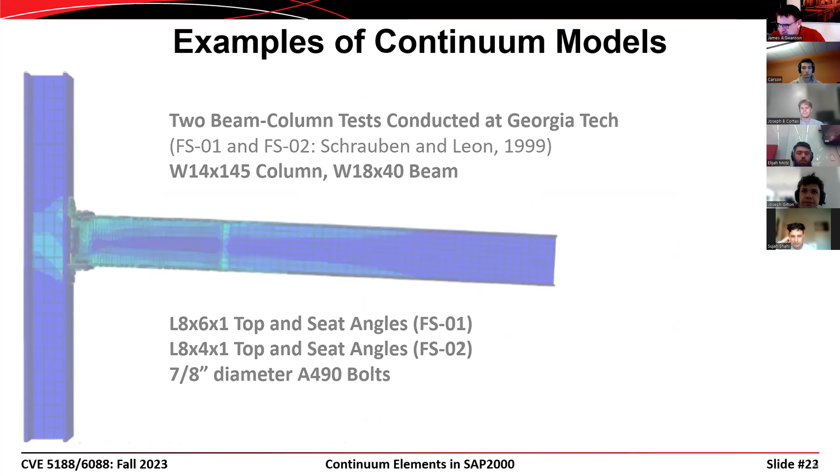something silly like that. And then we could go in and we could look at those angles and see the stress concentrations that exist at the angle when that connected leg starts to bend. And then you see these concentrations here. And then ultimately, if we were doing it nowadays, we would want to capture some fracture at that location, but fracture wasn't a possibility back then.

All right, so I mentioned that the formulation of the stiffness matrix for these continuum elements is computationally expensive. And the reason why is that they don't have a closed form solution for the stiffness matrix. When you go in and model a frame element or a beam element or a truss element, you just have a 4x4 or a 6x6 stiffness matrix that you can substitute values into, E, I, L, cosine, sine. And so that's relatively straightforward, even using a package like Excel.

But when you look at a continuum element like this that could have geometries that are widely varying, you could have a quadrilateral element, for example, that is nice and well behaved that looks like that, but you could also have a quadrilateral element that looks like that. And so it's not possible, it's not convenient anyways, to have a closed form solution. Instead, what you do is you define something called a shape function that defines the variation of the independent parameters across the dimensions of your element.

So if we're looking at a plane stress element, for example, what we would do is define the stress or the strain relationship as you move from one node to another. So the stress might vary as you move in this one direction. It might also vary as you move in this two direction. And so what we have is a function based on the shape of the element that gives us the stress as we move from one node to another node, or move from one point to another point within that particular element. These are called shape functions.

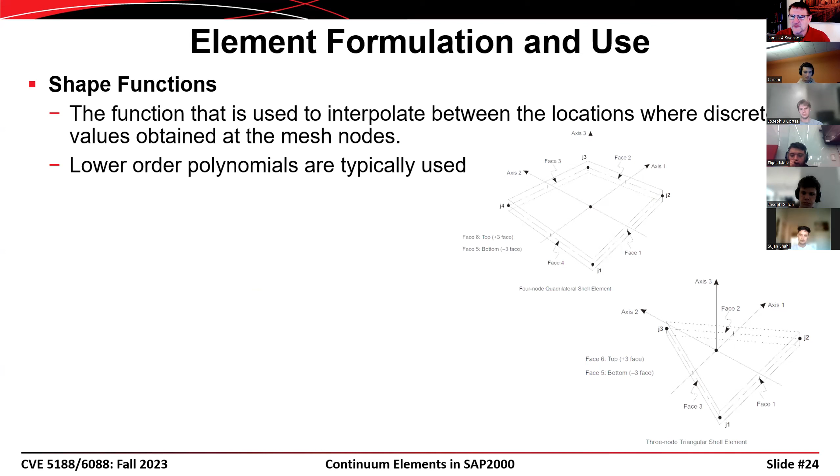shape function instead. I'm sure that if you ask Dr. Rosati, he teaches the 7013 class or 7012 class where they talk about finite element modeling in Abaqus. He has a much more elegant definition of these than I do.

So if we look at the triangular elements, they're usually a constant strain triangle or a linear strain triangle. In order to define a linear strain triangle, you need 3 additional nodes. So you have 3 that are defined here. You would also have mid-face nodes that are defined like that. And then with that extra displacement, you can define linear strain variation over the face as well.

When you look at quadrilaterals, you can have constant strain, or you can have a situation where you have extra nodes defined on two faces. That would be 6-node Q6. You could have a case where you have nodes defined on all four faces. That would be a Q8. And you can even have another variation where you have a node at the center of the element, and that would be a Q9. So you have 9 nodes defined.

And the more nodes you have, the higher order the shape function can be, and you can get more accuracy with a lower number of elements in your model. But the more nodes that you have in an element, it adds to the complexity associated with generating the stiffness associated with that element.

So it comes at some computational cost. So there's a cost benefit ratio. You have fewer elements that are higher order, then you save computation by having fewer elements, but you have extra computational costs by having a higher order shape function. On the other hand, you can have a larger number of elements that are a lower order. You add costs because you have more elements, but you save costs because you have a lower order shape function instead.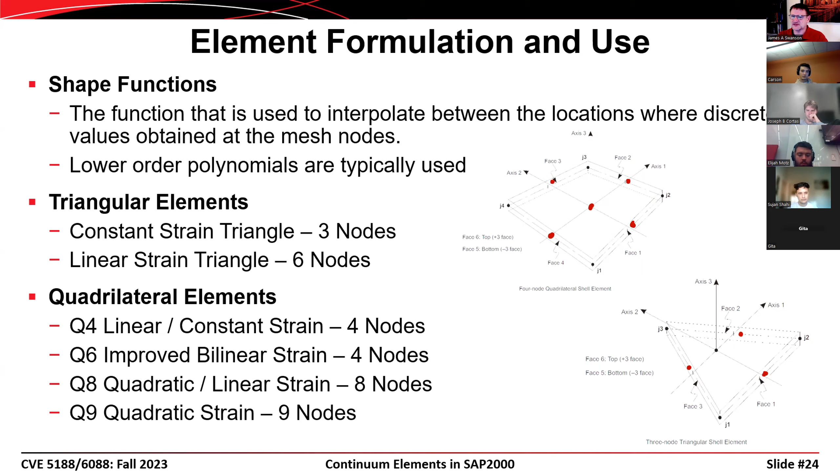So the stresses in these elements are computed exactly at certain points within the elements. These points are called integration points, and we numerically integrate the shape functions in order to get the stiffnesses. And so the process that almost every package uses is a process called Gauss quadrature. And you guys might have learned this back in calculus. My guess is that if you did, they probably spent 15 minutes talking about it, because I don't think the mathematicians really use it that much.

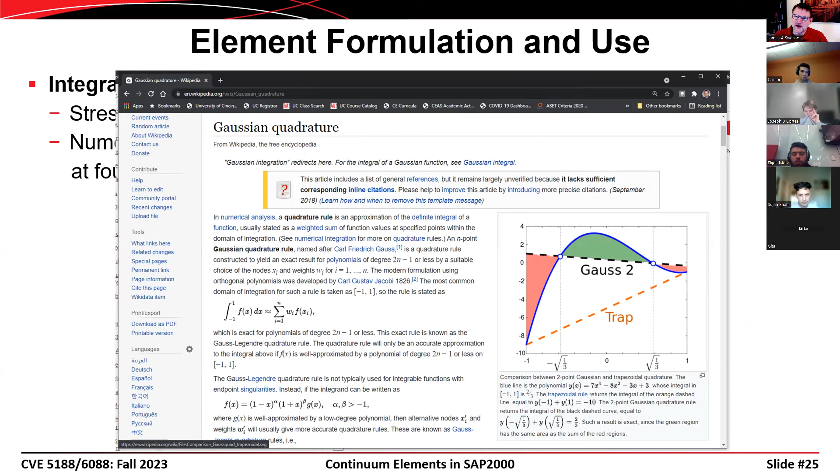But it's a very convenient way of numerically integrating in order to go from the element definition to the stiffness associated with that element. So Gauss quadrature is typically used. And because of that, when you look at the integration points, they're often referred to as the Gauss points within an element. And so when you go and look at the output from a quadrilateral stress element or a triangular stress element, they'll usually report the stresses at the Gauss points or at the integration points.

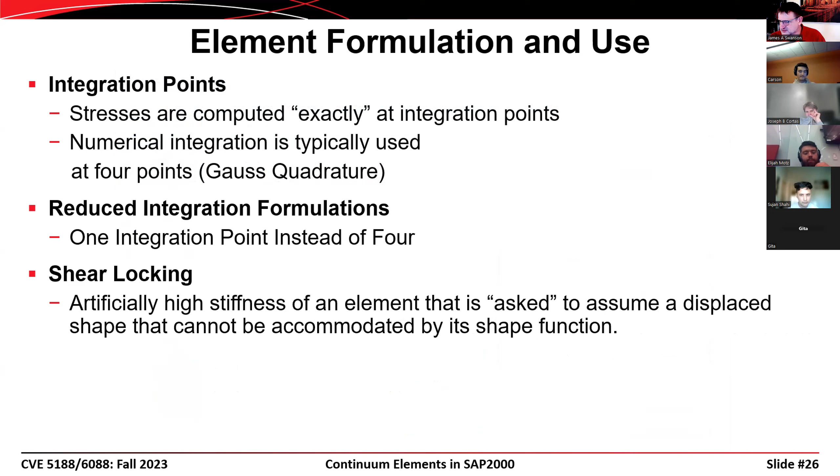So you can have reduced integration formulas that reduce the amount of integration that's required, 1 integration point instead of 4 integration points. But then when you use those, you end up with some side effects to reducing the number of integration points. And one of them is shear locking. You can also end up with hourglassing problems as well. And this is a deformed shape that is indicative of that hourglassing.

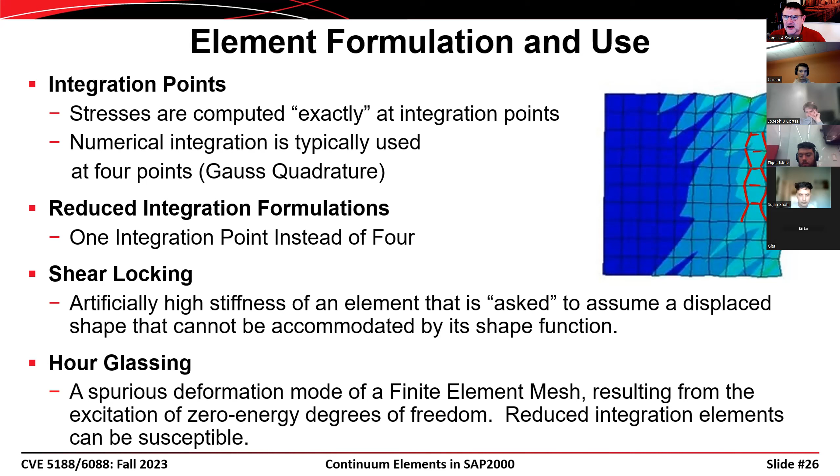And so what you see is these elements tend to deform like that, and that is a problem with the formulation of the element. So if you end up with a model that looks like that, then you either need to go with an element that doesn't use reduced integration formulations, or you use a finer mesh using the same elements. And often when you go with a finer mesh, you can get away from that hourglassing or that shear locking.

All right, the shape of a plane element matters as well. Generally, if you're using a quadrilateral element, what you want is one that looks like a square or a rectangle. You get more accuracy, better results out of that element than you do if you have one that has goofy sides on it. So what you want to see are elements that look like this, maybe an element that looks like that. What you don't want to see is an element that looks like this, right? Yes, that is a quadrilateral, but when you start using the lower order polynomials to approximate the shape function for that, then you end up with a lot of error in that particular geometry definition.

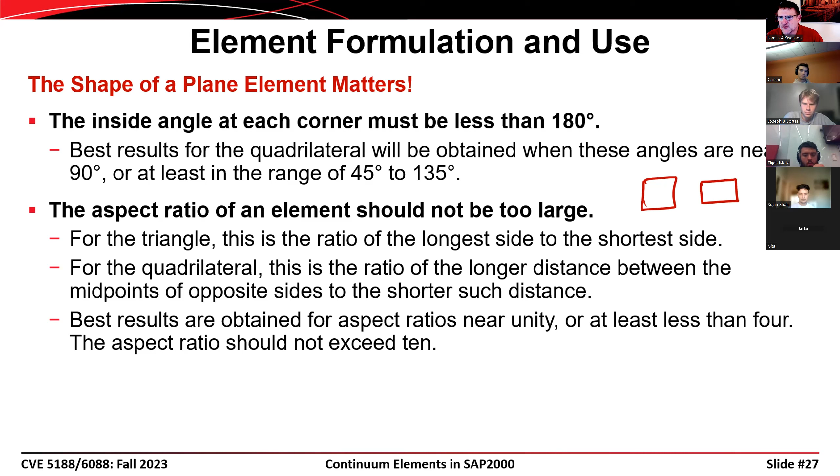So the aspect ratio also matters. This is ideal. This is usually okay, but if you have a quadrilateral like that, then that's usually not okay. What you would want to do is break that up into a number of sub-elements. So you'd be better off using 4 elements that are approximately square than you would be using 1 element that is really oblong.

Here it is. So this particular slide shows a model of a plate with a hole in it. And so what we were doing is applying a tensile stress up here like this, same thing down here at the bottom, and we were looking at the behavior of this plate with that hole in it and looking at the stress concentrations.

So we talked about the idea of axes of symmetry or planes of symmetry when we were talking about joint constraint definitions. And so one of the things that was done was you can actually model 1/4 of this physical structure. And so you have an axis of symmetry here that can be taken advantage of. You have an axis of symmetry there that can be taken advantage of.

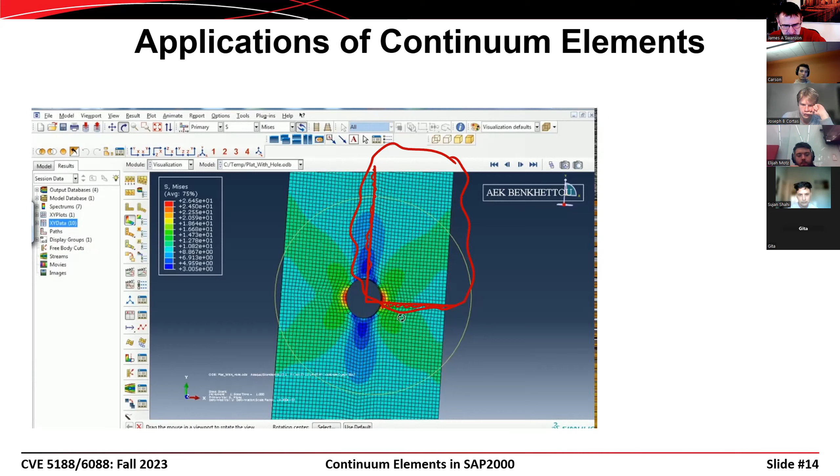Then you would come back in and you would increase the mesh density. Usually there's a seed number, a seed size that you would put in there that's an indication of how dense you want the mesh to be. You would again look at those results, and maybe they change by a fair amount going from model 1 to model 2. And so you keep modeling it with an increasing density until the results that you get are about the same from one model to the other. And that mesh sensitivity study then will tell you how dense the mesh has to be in order to get results that you need without being too dense so that you use computer time that you don't need.

All right, and you also have to be careful when you vary the density of a mesh. If we go back and look at this slide, they use triangular elements everywhere. I don't see any quadrilateral elements in these. So the triangular elements are nice because you can fit in odd shapes with triangles, and it usually does a good job of matching up the nodes. But remember that there are nodes at every corner of these triangles. And when you look at the way this is connected, the only place that one element is connected to another element is at the nodes.

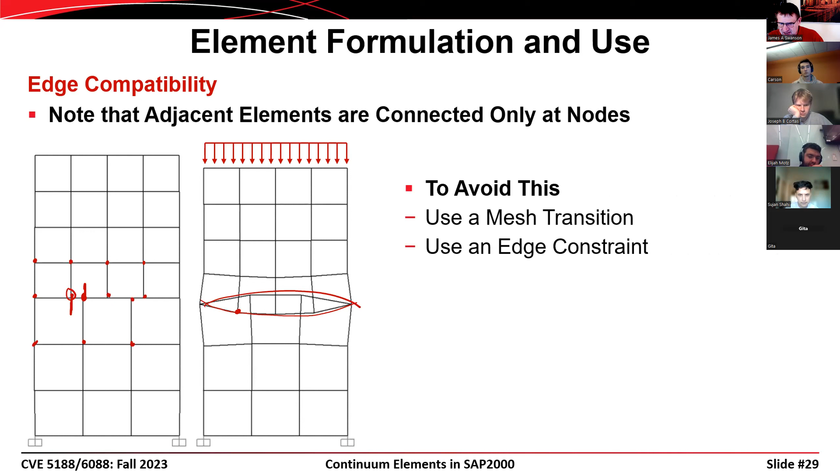And so if we go in and look at this, for example, there are nodes associated with these bricks, like that, and there's nodes down here too, but this element here isn't attached to the element below. This element here isn't attached to the element above. And so if we come in and apply a load to the top of this, you end up with an overlapping of these two edges because those nodes aren't on both elements on both sides. So there's a couple of ways you can accommodate that. One is you can accommodate it using a transition mesh. The other is to use an edge constraint.

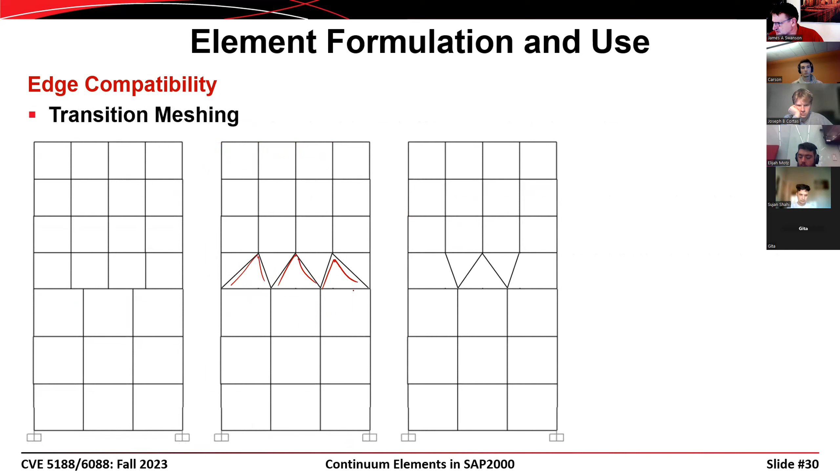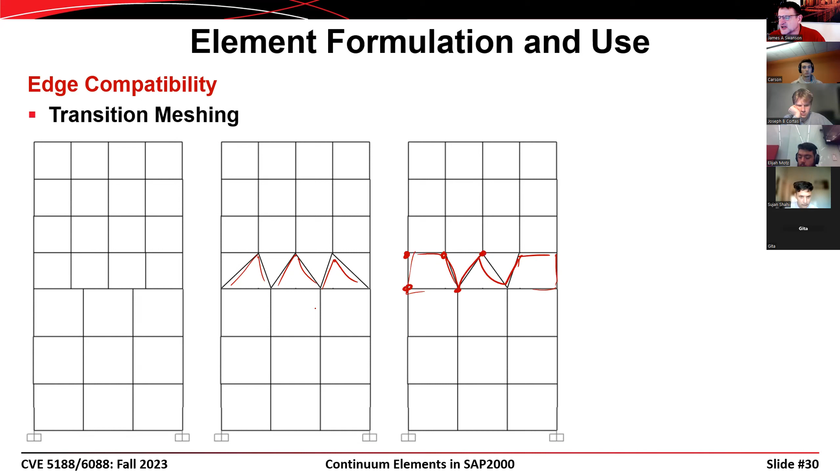So here is a transition mesh where we've gone in and used triangular elements in order to accommodate the difference in the geometry. Here we use 1, 2, 3 triangles and 2 quadrilaterals. And so again, at every point, these elements are meeting at a node. The alternative to that is to use an edge constraint. And an edge constraint is where you go in and use the joint constraint and you say, I want all of the joints on this particular line to behave as though they are on an edge. And then when you do that, you can have mismatched meshes like this. That's hard to say. Mismatched meshes, and the joint constraint will take care of the mathematics automatically for you.